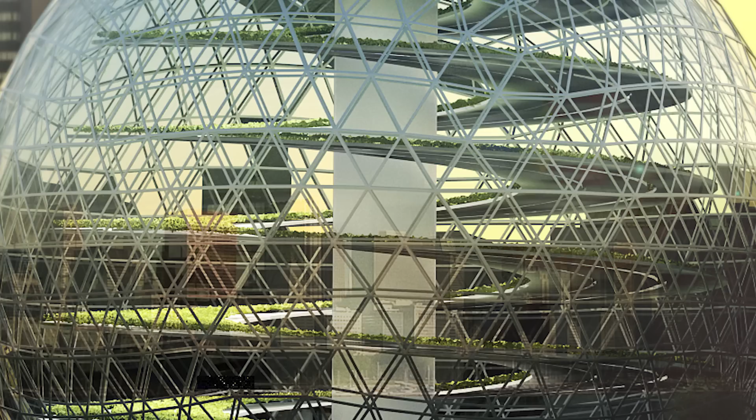An innovative collaboration within the Swedish clean tech industry created the Plantagon solution for industrial and scalable solutions. However, to really make this technology work, one needs to combine competencies from many different areas within energy, biology, waste management, and infrastructure. We put all our efforts into developing industrial, scalable, and economically viable solutions for the future cities of the world. And we can integrate greenhouses into city infrastructure.

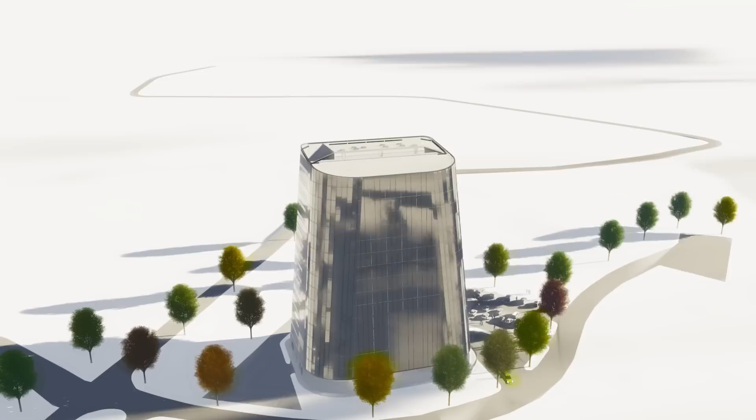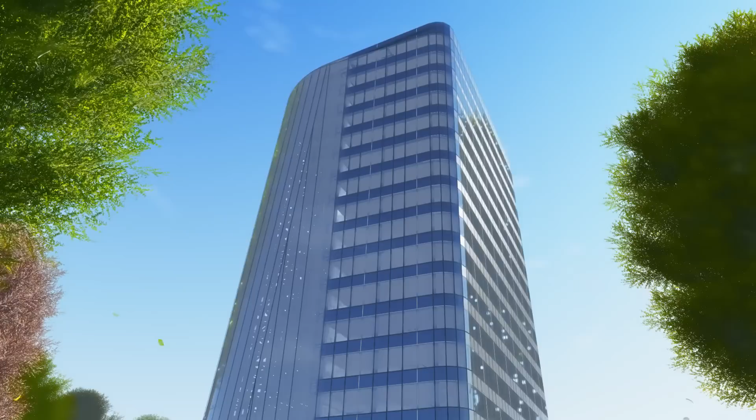Real estate companies invest heavily in cities, yet we have used technology to add even more value to their development projects. This is our demonstration plant for a temperate zone, being built in Linköping, 2 hours south of Stockholm. It's a 60-meter or 65-yard tall office building, producing 500 tons or 1.1 million pounds of vegetables per year on its south facade.

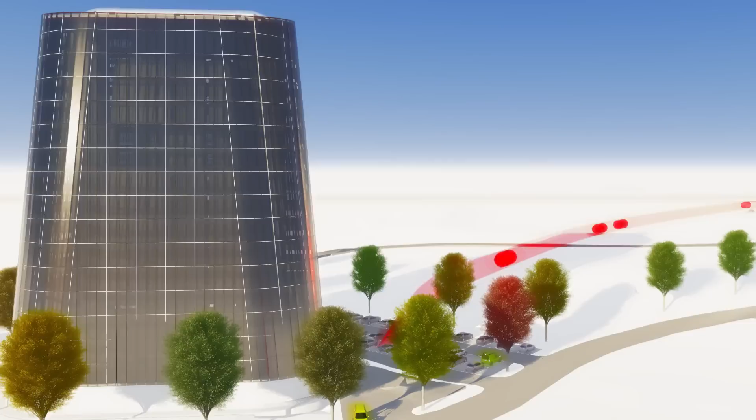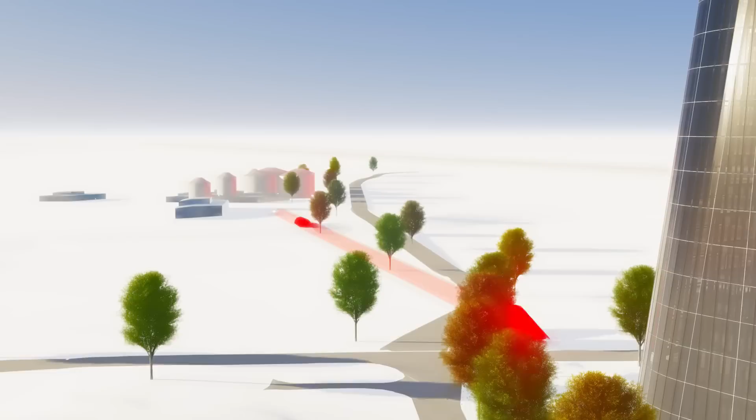To illustrate how energy use and CO2 emissions could be lowered, we initiated this project as an industrial symbiotic system, a partnership between Plantagon, the local energy company, and the local biogas plant. The greenhouse uses district heating supplied by waste burnt at the power plant, and we also receive excess heat and carbon dioxide from a nearby biogas plant. What's left over from the greenhouse goes into the biogas digester. This way, we turn 3 different waste products into tradable goods and make environmental work profitable.

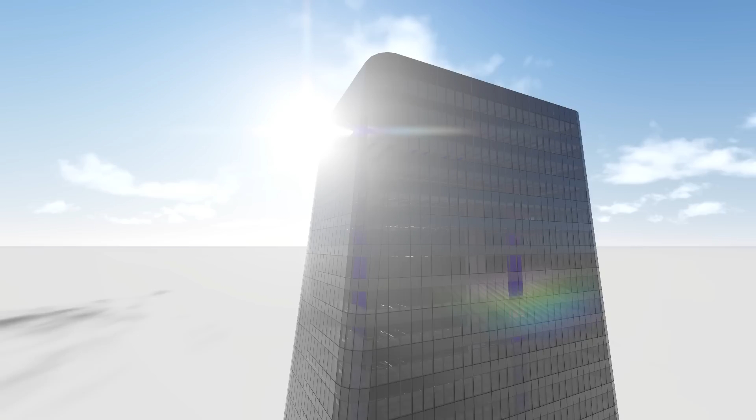Now, since we've started the project, we've developed even smarter solutions. In this pioneering project, all disciplines have to work together: architecture, construction, electrical, waste, water, industry, and others, all in one place. The greenhouse is designed to let as much sunlight in as possible, yet due to the multiple-story design, LED lights are used to provide additional lighting, without creating as much heat as traditional lighting.

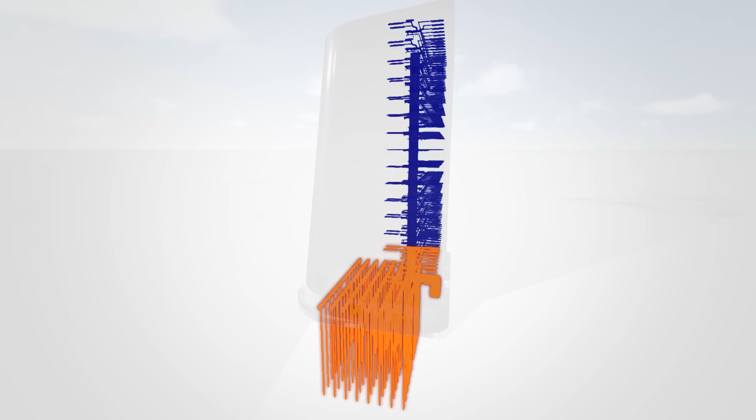However, from time to time, we have more heat than we can use, and this is stored in boreholes beneath the building to warm the office side of the building during winter. Vertical farming in a closed environment free of pesticides and other pollutants requires a double-skin facade. Otherwise, it will not work. This technology allows the control of airflow and heat in an economically and environmentally viable way.

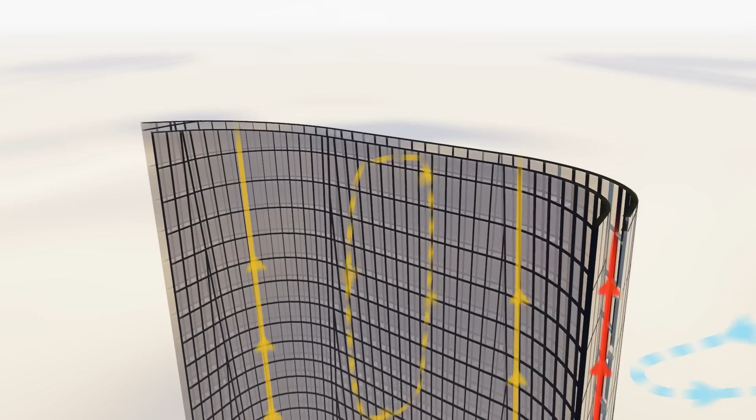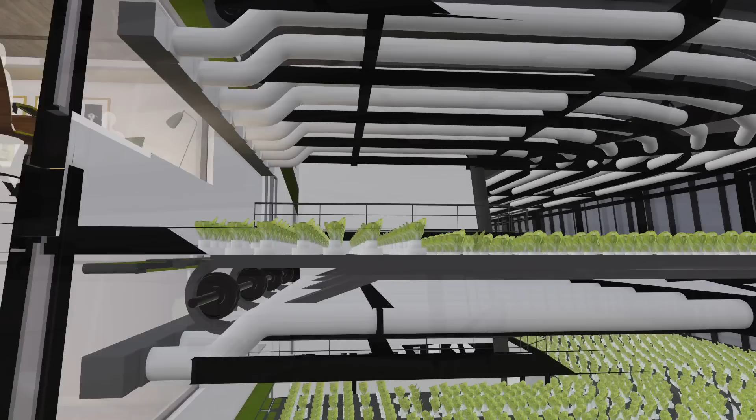Plants consume CO2, and so we need to boost the levels of CO2 in the greenhouse. And since the cleanest CO2 there is comes from our own breath, we push the CO2 emitted from the hundreds of people working in the building to the plants, and we take the oxygen given off by the plants and push it into the office building. This sets a new standard in indoor environments. It's almost like creating a lung for the city.

Let's go inside and see how it works.

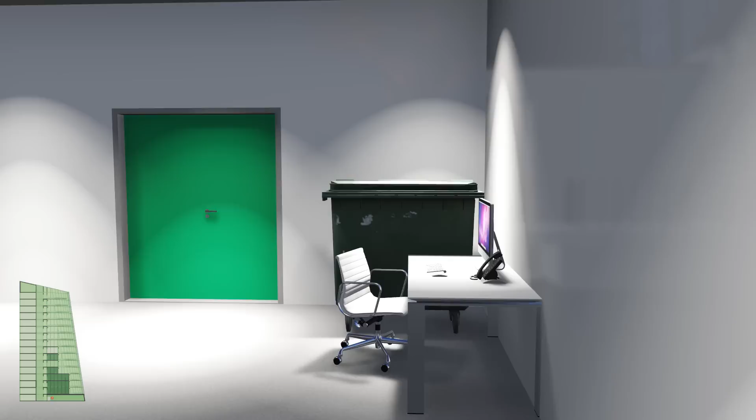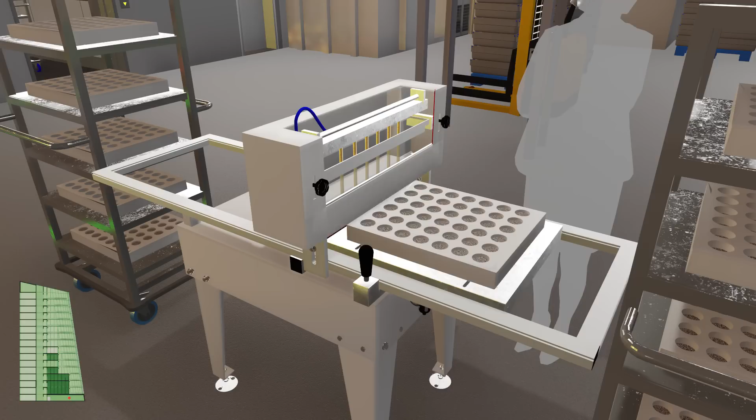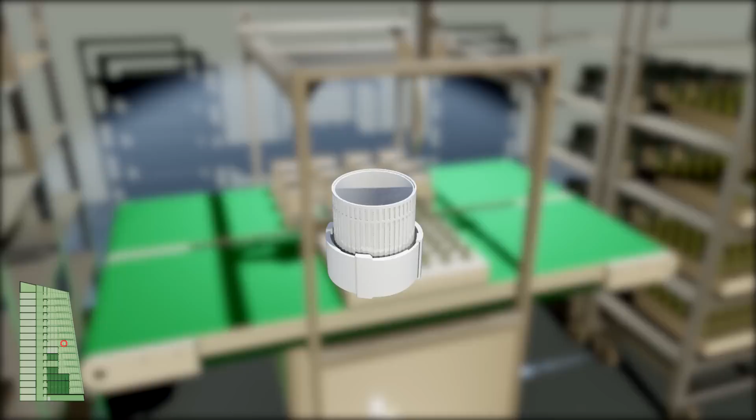It follows the law of the seed. Everything is designed to optimize conditions for the plant. Seeds are grown in trays covered by small cells filled with pumice. The seeds are then moved to a germination chamber in order to give them an optimum start in life. After germination, the young plant is moved to a larger, expandable growing pot, which Plantagon calls a U-pot. After this, the plants are transported to the 16th floor, where they're placed on the vertical food production line.

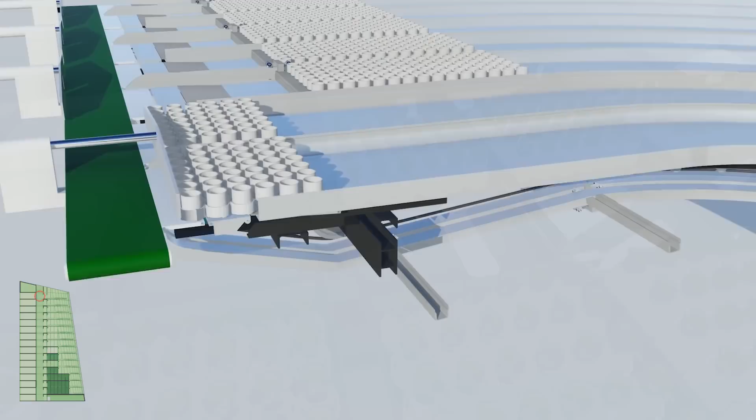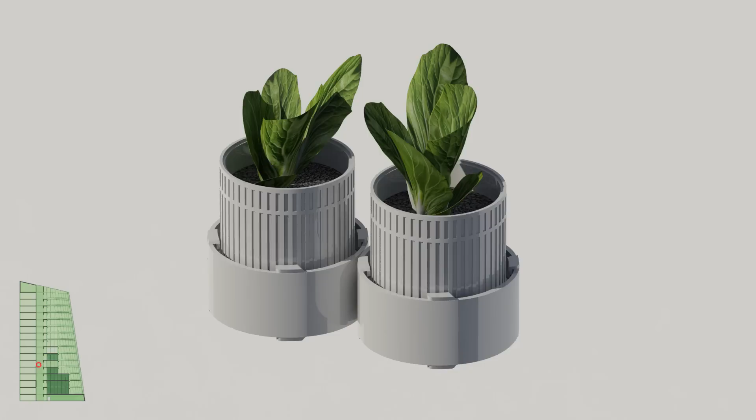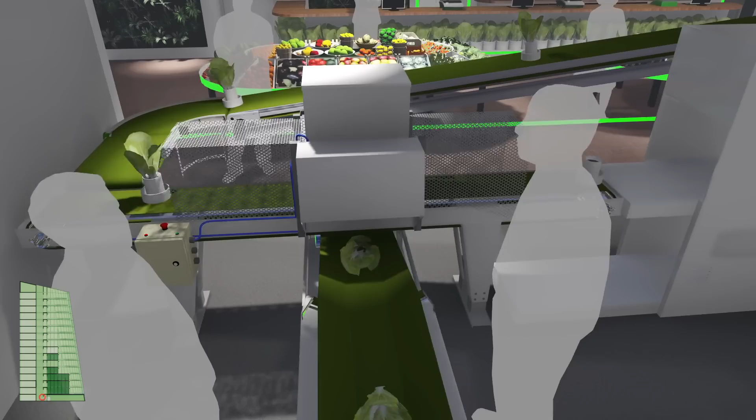We irrigate by filling the cultivating tray with about 2 centimeters or 1 inch of water. The excess water is drained away. Water not absorbed by the plants is then filtered and reused on the first floor. As the plants grow, they need more space. By optimizing spacing in 2 directions during plant growth, Plantagon significantly increases production. The individual plants are removed from their growing pots, and the pumice is sterilized and recycled.

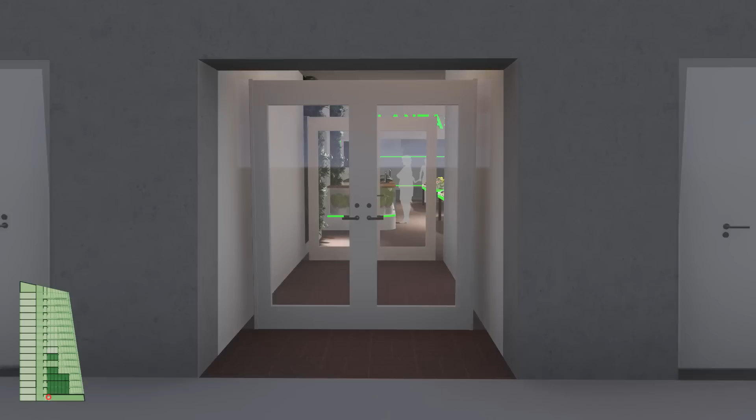We'll invite local organic growers to sell their produce at our Plantagon store. Or why not enjoy the view from the Urban Farmers Sky Bar?

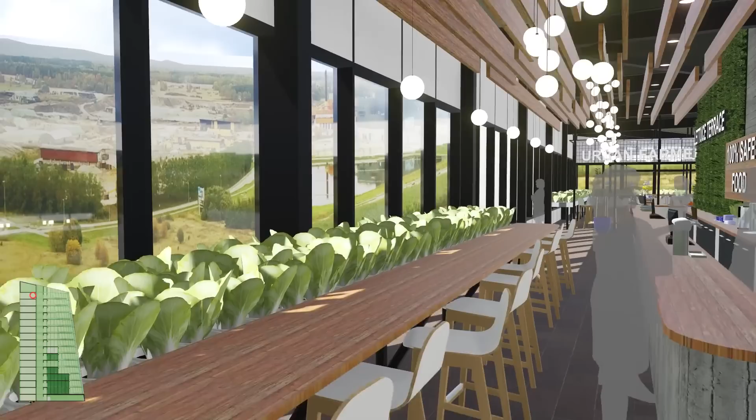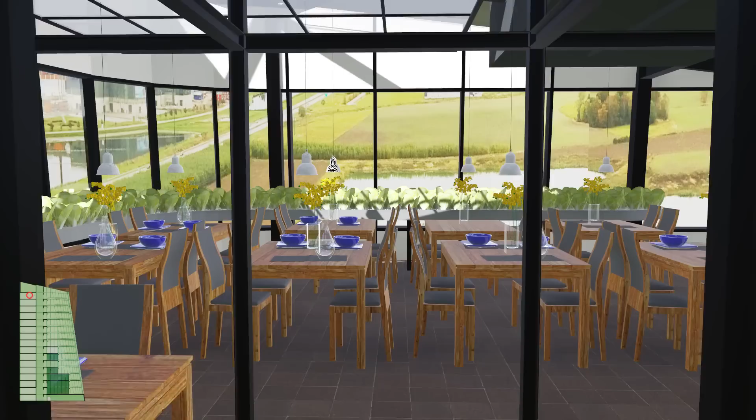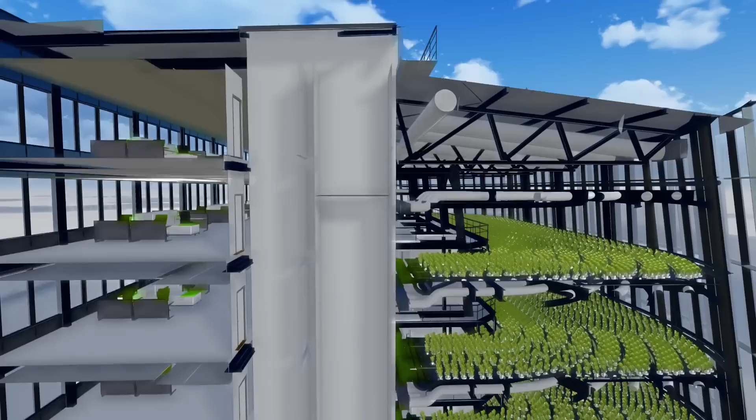In short, what we have shown here is a profitable, super green real estate and urban farming solution. One that produces the best indoor climate for both people and plants, and makes extremely efficient, local, safe food production possible. A solution that will put food on our plates for decades to come.

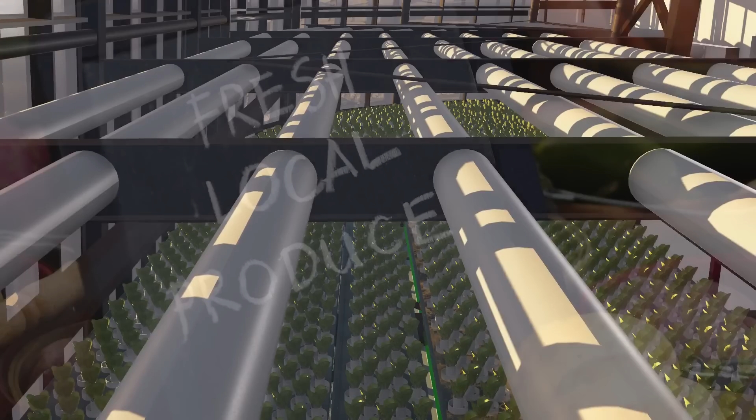We save 3.6 million kilometers or 2 million miles of transportation, 1,000 tons of CO2 emissions, 50 million liters or 13 million gallons of water, and 60,000 square meters or 15 acres of land. With this transformative solution, we produce 100% clean food, free of pesticides and other pollutants, for thousands of people, using fewer resources than any other solution on the planet. It's scalable, efficient, and it's fresh.

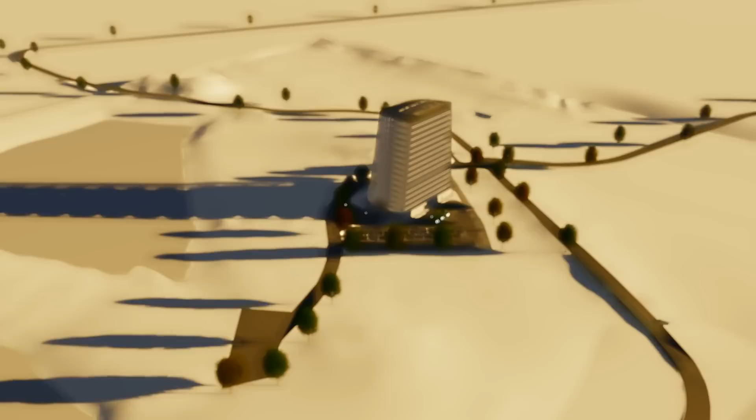During the next 15 years, the city will undergo major development. Then, we'll not only store our excess energy, but sell it to our neighbors. Perhaps this will be the first truly symbiotic city in the world. It's something we not only dream about, but something we're working hard to realize every day, in everything we do.

Plantagon Urban Farming. Growing soon in a city near you.